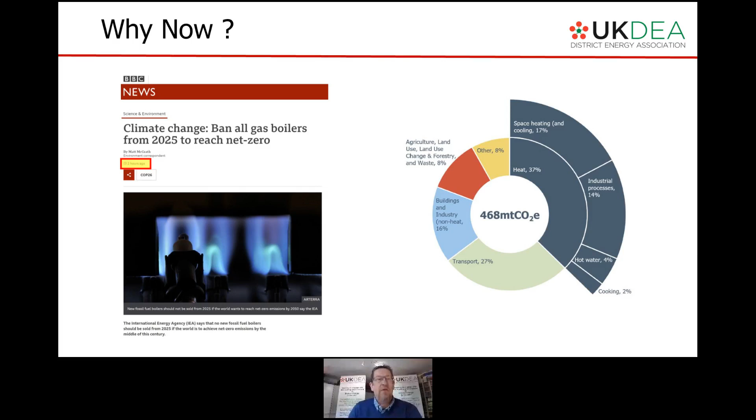So before we go into the conference itself, I'd just like to tell you a little bit about the UKDEA to explain who we are if you haven't come across us before. So we're a non-trade, not-for-profit organisation, and we offer guidance and support to everybody in the sector who wants to join us. We've got scheme developers, owners and partners at the core, as full members, and then around the side we've got the extremely important associate members, the equipment suppliers, installers, consultants, education, services and providers, etc. And our remit, our reason for being, is to offer guidance and support and raise awareness.

And we started from humble beginnings in 2010, over 10 years ago, with 6 founder members. We're now approaching 130 members and we're growing rapidly. I was having a chat with one of the speakers yesterday and explaining that this last month we've seen 5 new members join us, and these aren't people who are going out and aggressively selling the concept of district energy. These are people who are entering the sector and approached us and asked to join. So that's a really exciting development, and it just shows that the time for district energy is now. And all the major district energy schemes in the UK are represented by the UKDEA.

So just finally for me, as an introduction, to explain a bit more about what we do and what you can gain if you're a member of the association. So we're a respected voice for raising your concerns to government. As you can see, this is a joint event with BEIS. We work in very close collaboration with them. We publish every month a 50-page journal. It's pretty much everything going on in the world of district energy in the UK. That keeps you up to date and informed. You don't have to check the news feeds. You don't have to surf the web. We do that for you. We bring the news to your inbox.

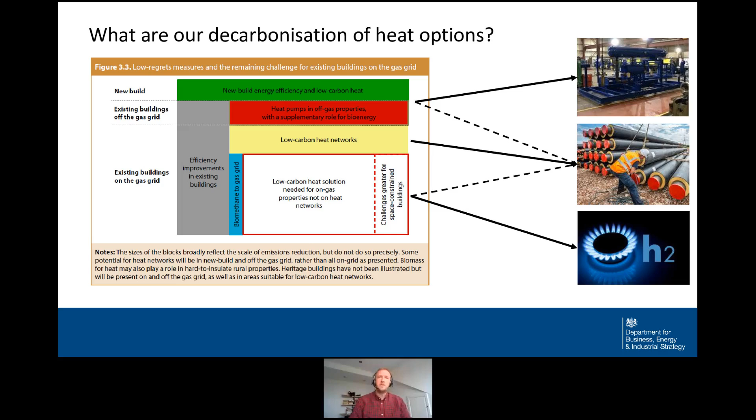We've been talking about decarbonisation of heat for a number of years, and broadly we talk about these various pathways to decarbonisation, and these will be familiar to you by now. Broadly, there's an electrification pathway, heat pumps, electric boilers, etc. There's some kind of low carbon gas, hydrogen pathway, and of course there's heat networks. I think historically heat networks have been seen as a third pathway, but I think that's unfair. I think it's a pathway that facilitates both of the others, with an important addition that we're going to come on to today, which is that heat networks can, of course, unlock the large-scale, low-carbon sources of waste heat that the other pathways can't on their own.

So, where are we today? Well, heat networks, as you'll know, are right the way across the country. There's tens of thousands of them, but actually they're still only providing around 3%, and I'm doing a bit of a friendly rounding up here, around 3% of UK heat demand. And the latest Committee on Climate Change report suggests that actually, we could be delivering up to 20% of heat by 2050 to help us deliver net zero. So, huge amounts of effort and work to date, but still a long way to go.

I mentioned one of the reasons that government really likes heat networks, and that's their ability to unlock these large-scale, low-carbon sources of heat. The kind of stuff that you just wouldn't do on a building level scale, whether that's energy from waste, mine water heat. We've recently seen heat coming from the Tube in London, large-scale water source, industrial process heat. Many of the things that we're going to hear later in today's session. Probably not going to do that on a building scale. You definitely can do that from a heat network perspective.

I mentioned that actually, a heat network can respond to any future pathway. So, if hydrogen is proven, then actually heat networks are well placed to make that as efficient and safe a process as possible. If we end up going the electrification route, there's definitely benefits from that side. And the way that the heat network can interact with this energy system in a really efficient way, reducing overall demand, is a real positive for us.

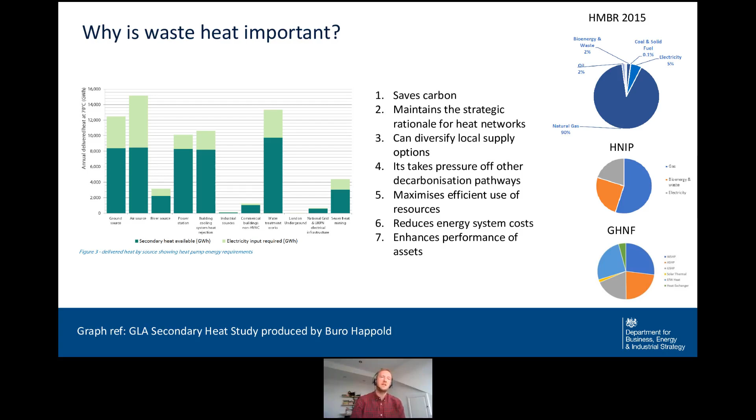Simon talked at the outset about all the news about the move away from gas and how it's starting to gain public and political acceptance, that this is something that's going to be a really important next transformative stage. So I guess I was just going to close on what are we doing about it if we care so much, and I'll just do a kind of whistle stop tour.

I mentioned the Heat Network Investment Project. That's in its final year and has been our 320 million capital scheme. We've got another 2 funding rounds remaining, and that's definitely kick-started the transition from high carbon to low carbon. The Green Heat Networks Fund, due to launch next year, is our new capital scheme, and it really looks to build the foundations for a low carbon market in heat networks through the rest of the decade, supporting connection to energy from waste, large scale heat pumps, etc.

We've got our new heat networks efficiency scheme, essentially looking to optimize some of these networks. That has benefits on its own, but actually some of these optimizations might also enable connection to waste heat, bringing down the temperatures. And we've got a skills program planned, looking to make sure that we've got a marketplace capable of meeting the needs of this growth that we need to see throughout the 2020s.

And then, of course, we've got a regulatory package. So our heat networks market framework, which includes our planned regulation for the sector, and also our heat network zoning policy, where we're looking at ensuring that we're able to designate certain areas as heat network zones, be clear on the buildings that we expect to connect in those zones, and then consider the appropriate levels of mandation to ensure that heat networks we think are economic and technically viable are built out and start meeting the needs of the sector.

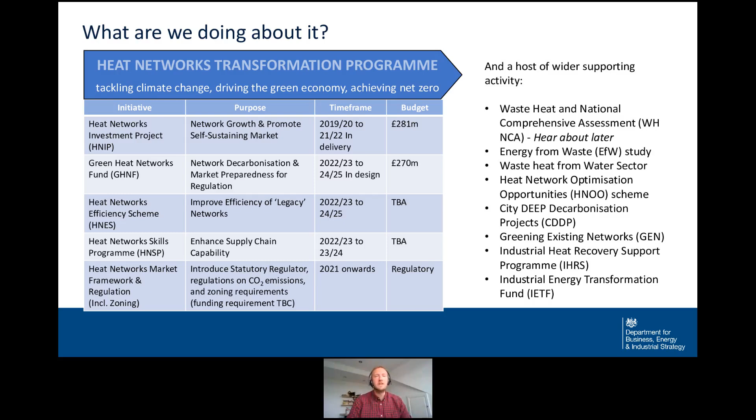And again, we're going to hear more on that, I think, on Simon's presentation around the various ages of heat networks. So that was it from me.

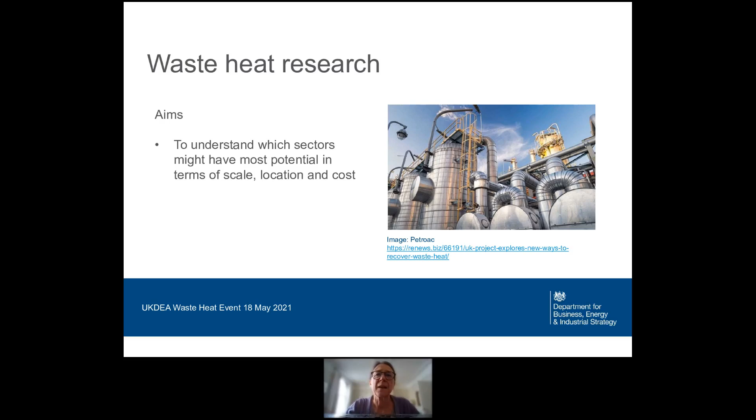So we started by asking Arup and LSBU to help us scope out which sectors to cover. So they looked at existing studies, so what we didn't need to repeat, the scale of opportunity, data availability, data being a critical aspect in this kind of work, the heat potential and so on. And we came up with a list, which we grouped here into 4 categories just to help organize the data. 2 specific ones, which are electricity substations and wastewater, and 2 more catch-all ones, industrial heat recovery with things like cement works, chemicals, paper and pulp and so on, and then what we've called commercial, so cold stores, data centres, supermarkets and so on.

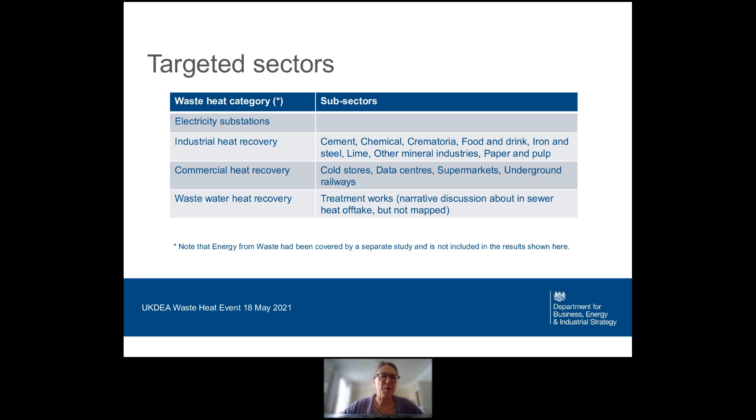So once we decided on the sectors, Arup and LSBU then drilled down into them to get an understanding of the potential in terms of the numbers and locations of sites, the scale in terawatt hours of heat, how that's distributed across the different asset types within that sector and so on, before undertaking the really detailed analysis on each sector.

So this technical analysis involved quite a challenging task of coming up with what I call, in inverted commas, a typical configuration for heat recovery plant for each sector. I'm not going to go into this in detail as I'm not a technical person, and Joel's going to be covering it a bit later, so please save all your questions for him. I'm sure he'll have all the answers.

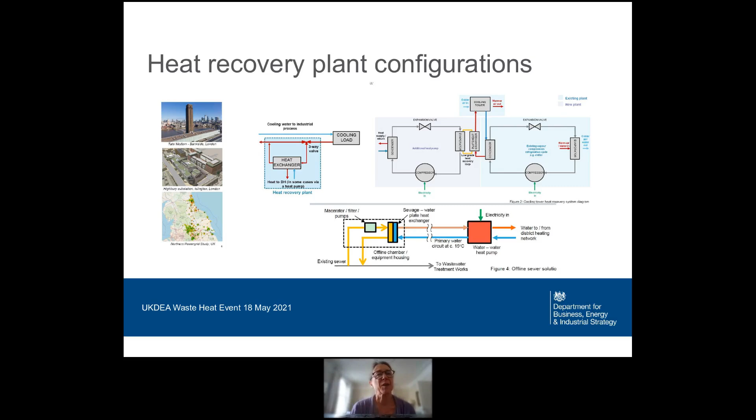But essentially, it was pretty challenging to do this at a generic level when in reality every plant will be different. But they managed to achieve a really good balance of detail and generality, which worked well to serve our purpose. So the important thing was to identify and size all the bits of kit needed to recover the heat from the various different processes so that we could price this up and develop a costing metric that would enable comparison between the different sectors.

So, sorry, this isn't a great slide, rather a lot of information on there, but effectively what we got from the research was a great big database and some maps. So this is an extract from the database. Lots of information here, but the main things to note for now are that these sectors alone identified about 10,000 sites across the country, excluding Scotland. And between them, they're releasing some 60 terawatt hours of heat, just way off into the sky. For context, the estimated heat demand across the whole of the UK is of the order of about 470 terawatt hours. So that puts it in perspective.

The sources in the different sectors generate heat in different ways, and you extract it in different ways, and it's at various different temperatures. I've ranked it here in terms of temperatures. We've got the high temperature industrial processes at the top, like cement and iron and steel, and the low temperature commercial utility processes, such as cold stores, water treatment works, and so on at the bottom.

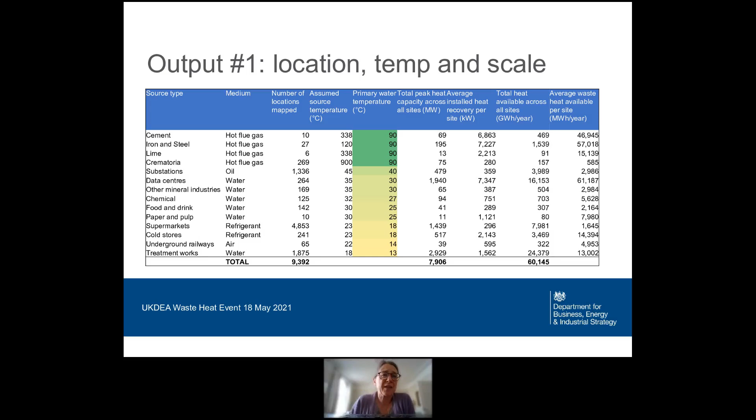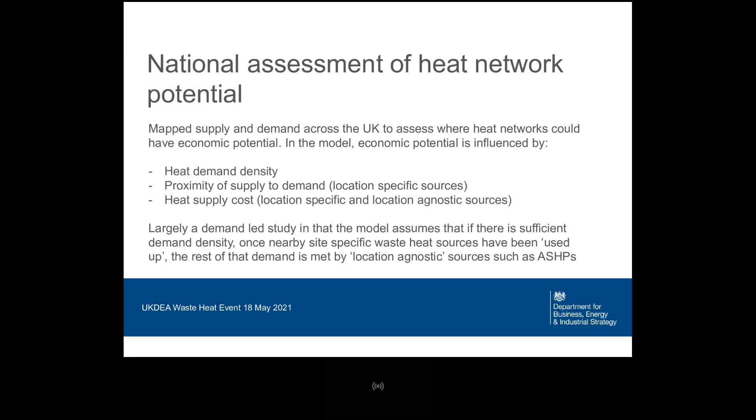So how have we been using this data? Well, as well as helping us to get a feel of the scale of the potential for the different sectors, we've also used it as a key input in a national geospatial model. So we've combined it with building level demand data to try and work out where heat networks could be a viable proposition. So the model uses an algorithm which pulls together demand density, proximity of demand to supply, and the cost of supply. I'm afraid the assessment hasn't yet been published, so I can't share data with you just yet, but I can show you some of the maps that have been generated.

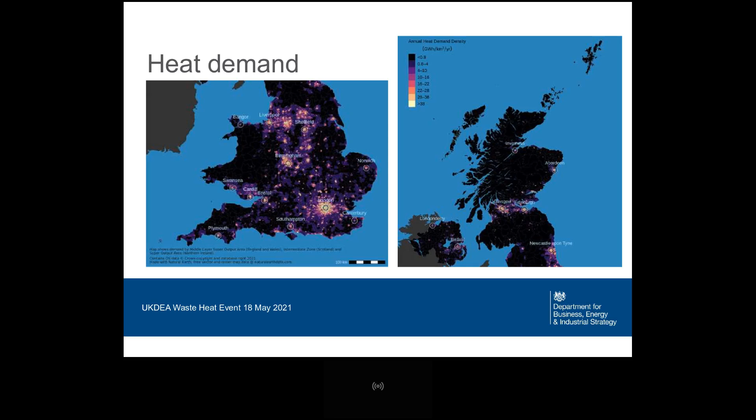So this first one is of heat demand. In many ways, it's not particularly surprising. You see the bright spots where there are big cities. This is based on pretty granular building level data from Ordnance Survey combined with benchmarks of heat demand for different building types. And we had tried to do some kind of calibration with gas demand where that was available.

And the next slide, this is showing the heat sources. So this includes the heat sources I've just been talking about, but it also includes all the other ones like energy from waste, the thermal power stations, CHP and so on. We had to map this at LSOA level rather than as point sources due to data permissions issues. As I said, that's been an underlying challenge with this piece of work, getting access to the data, and it's meant that we cannot yet publish the detailed data underpinning some of this because of permissions issues.

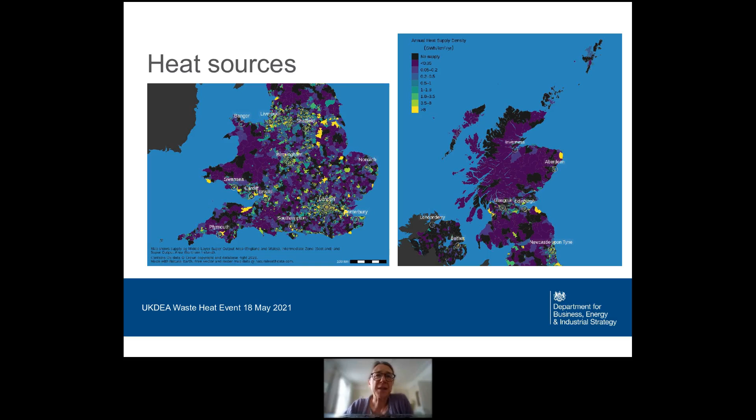So it's worth noting that the total waste heat mapped was of the order of 370 terawatt hours across the whole of the UK, while demand is about 470. I thought it was quite useful or interesting to show the two maps together side by side.

So here, the demand on the left and supply on the right, you can immediately see that the high levels of demand and high levels of supply are distributed slightly differently, which in many ways is no surprise. They're doing different things. But there are overlaps, and clearly this is where our interest lies and where we think that the prize is.

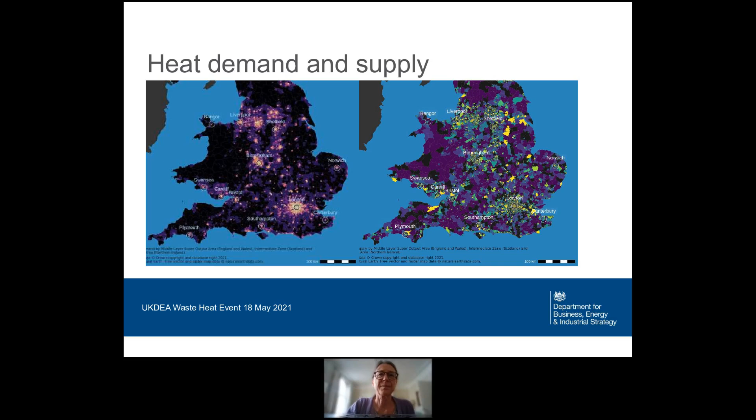And the final map is where the model suggests that heat networks could have most potential. So this, as I say, matches supply and demand, where the supply is the point sources we've been talking about, but it also allows for heat to be supplied by what we call location agnostic sources. So the model will say, okay, there's enough heat demand in this area to warrant building an energy center with a large air source heat pump or ground source or whatever. So the distribution follows pretty much the demand distribution.

So very quickly in summary, I think I'm coming to the end here. Basically, there's a lot of waste heat out there being generated across the UK. It's a resource that we really want to capture and make use of. Different sectors have different characteristics, which we'll hear about later, in terms of the temperature of the heat, the technology required to capture it, where they are. And as a consequence, the cost of recovering heat from the different sectors is different.

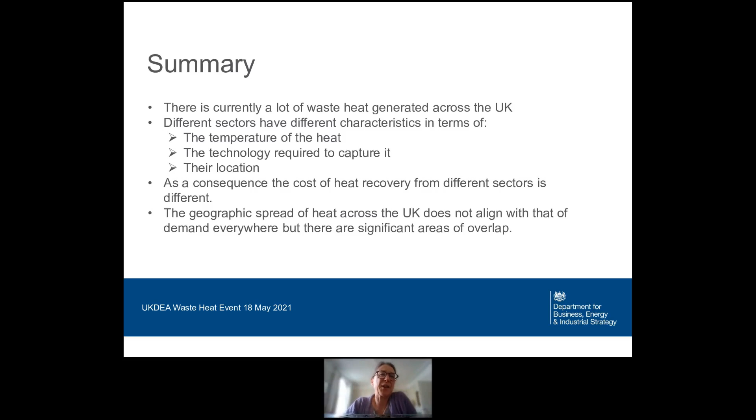As I said, the geographic spread of demand and supply does not totally align, but there are significant areas where they overlap, and those are where we need to target in the work going forward.

So that's it. Thank you very much. Thank you very much indeed, Hen, and really interesting. You've got a number of questions in the question session at the side. Refrain from answering them if you don't mind, because you can come back on the stage at the end of my presentation and answer them. But a lot of it is about the data set, when the data can be available. We've got lots of hungry delegates out there who want to start mining this and hopefully developing schemes themselves. So thank you very much indeed. So I'll invite you to leave the stage.

And we'll pass over to myself now, and I'll do a little presentation really explaining why we think waste heat is so important, a bit of a history lesson really, and I think hopefully you'll find this quite intriguing. So this is about utilising waste heat in what we in the UKDEA are calling the third age of district heating.

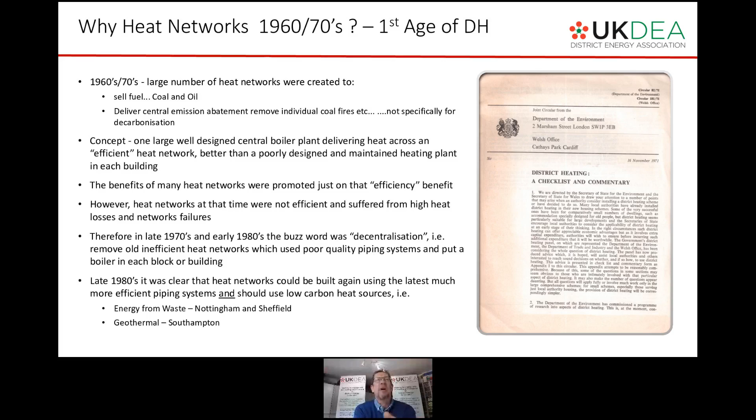However, we turned the corner. We realised, learning from our fellows in Europe, that you could build efficient heat networks, modern piping systems, etc. And in the late 1980s, you started to see a new breed of heat networks coming about. Energy from waste in Nottingham and Sheffield, big citywide schemes, geothermal in Southampton, etc. So that brought to the close what I would call the first age of district heating. So let's move on to what I would call the second age of district heating, a fairly stable period in my view, from roughly speaking 1990 to 2020.

So at the start of the second age, we've got a good understanding you can build heat networks, that heat networks are efficient, and a well-designed primary heat network should have heat losses of less than 10%, should ideally be 5 to 7. We're not talking there about secondary network losses in buildings. That's the subject of a whole other event we'll be organising, but ideally should be very low.

And there was really, as John showed on his pie charts earlier very helpfully, a very widespread use of gas-fired CHP, driven by spark spread, driven by viability, essentially an engine generator recovering waste heat. And there were many large-scale schemes delivered on that basis: Birmingham, Leicester, Olympic Park, etc., many, many others. So that was a long-term period. We're talking about 30 years.

But by the end of that second age, by the time we reach 2020, we're all recognising the grid is decarbonising. As John mentioned, there has been a focus on reducing the carbon content of the grid, and not so much on reducing the carbon content of heat. And although CHP remains viable, its carbon benefit is perceived to have been reduced. And already in the chat, we've got the expected question about the part that CHP has to play moving forward.

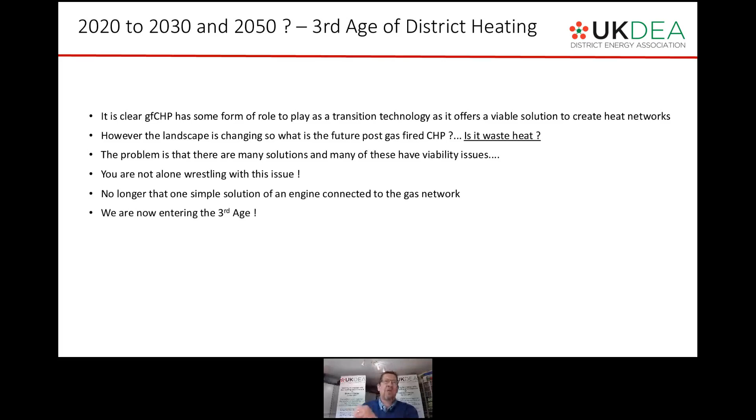But I think what's really important to say is you're not alone with wrestling with this issue. We are all collectively wrestling with it. And if we have a conversation together, we will find the right outcomes. It's where people try to do things in isolation that it doesn't work. So we are jointly on a journey to enter the third age of district heating and make that a success.

So I think the first question's got to be, in my mind, and John touched on this, is why are we even using heat networks? Why don't we all just go to individual building solutions, stop disrupting people, stop digging up streets, stop causing problems? Why do we need to put in heat networks? Well, to me, networks make sense if they deliver a material decarbonisation benefit that cannot be achieved at building level.

And this is exactly what John was talking about in his presentation. So either A, they're using heat sources that you can't access at a single building level: energy from waste, industrial waste heat from data centres. You're not going to build a heat connection to a data centre, very unlikely to do so for one building, again from energy from waste. You'll build a network because that's the only way you can make these viable.

And or where a heat network can bring improvements in viability, efficiencies, or financial economies of scale. So you can get an improved heat pump COP because you're utilising a source which is a higher temperature than, for example, an air source heat pump locally in the building. It also removes the need for widespread grid reinforcement, and it combines heat loads at different times of the day, week, dwellings, commercial, and increases the utilisation of central plant.

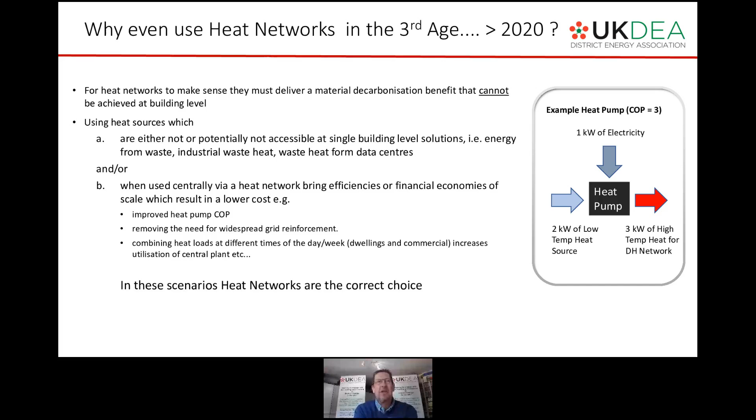Therefore, we believe firmly, and this isn't preaching district energy for the sake of preaching district energy, we genuinely believe, as does the government, that heat networks have a major role to play in decarbonising heat in the UK in the appropriate place. But it's complicated. And this is a bit of a busy slide, so I'll take you through it slowly, because I think it's important for people to understand, discuss, agree, disagree, etc.

They're not everywhere in the country. They are being developed in specific areas, and we'll hear about some examples of that this morning. Indeed, one of the next speakers, Gareth from Cardiff, will be talking about the heat network that Cardiff City Council are creating from the energy from waste plant in Cardiff, but the locations are limited.

So I'm just going to start with the definition of waste heat. If this is teaching you to suck eggs, sorry, but I always find it useful to check that we're on the same page. So the definition I like to use is that it's thermal energy that's currently being rejected to the ambient environment. That could be rejected to the air, just hot air, somewhere nearby, or rejected to rivers or sea, or possibly into the ground.

And it's also worth noting that although most of this presentation and conference is really talking about heat in terms of the hot stuff, it could also be cool. So if you've got a rejected supply of something very cold and there's someone that needs that cooling for something, then you could also use a heat network to grab that coolth.

I guess the main thing here is that we want to make sure that we're advocating the use of heat in an optimized way, and therefore minimizing it before we capture it. So what we don't want to be doing is encouraging waste heat just because we can then capture it and utilize it elsewhere. A really basic example of that is a supermarket: they might have quite a lot of waste heat, but you might realize that they don't have very well controlled refrigerators. So you probably want their refrigerators to be controlled first, maybe consider doors or some other things to reduce the load on them before trying to capture that waste heat. Otherwise, it doesn't really feel part of the whole picture of driving towards a sustainable future and net zero.

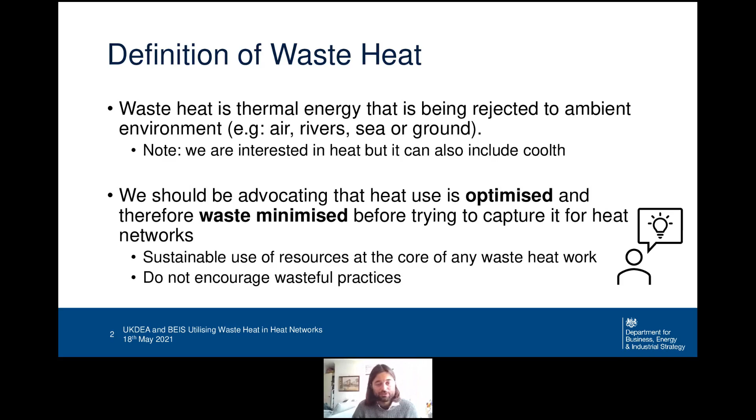So as was briefly touched on, particularly in the last couple of slides of Simon's presentation, the different types of waste heat I would break down into two categories: direct use and indirect use. Direct use is when the temperature is high enough that you can use it directly. We could say here that's in excess of 60 degrees, but it depends on the user's need. And indirect use would be something below 60 degrees, and typically you'd use a heat pump to upgrade that temperature. It's also worth noting that operating temperatures of heat networks is a contentious topic. There are lots of schools of thought on what temperatures they should operate at. And is it all about temperature as to whether it's direct or indirect use?

The following example will hopefully prove that it's not, it is, but it's also not. So if we assume that you've got a 50 degrees C heat source, could be from anything, you could have direct use of it if, for example, you wanted 40 degrees C for a biological process. Then you could have a heat network, take that 50 degrees C heat, run it around whatever thing you want to warm up to 40 degrees. You don't need to do anything with it.

Or if you're going to send it to a school and some other buildings that are probably quite old and need something above 70 degrees, then you'd need to use a heat pump. So I hope that gives an appreciation for what we mean by direct and indirect use, and it is really based on the actual end user's needs.

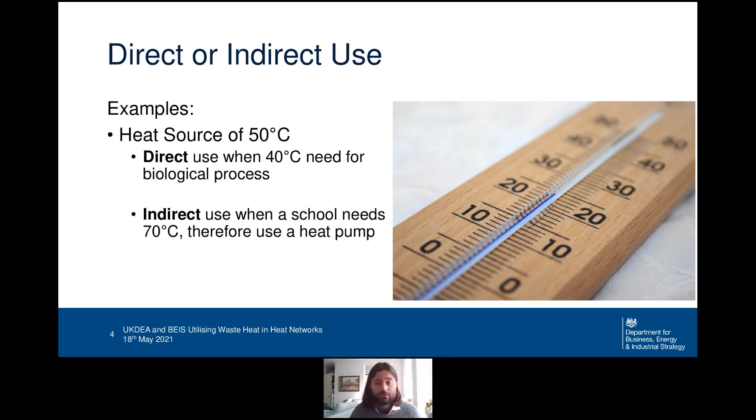And I think that's really key for a lot of heat network challenges, is that it's trying to match up how you deal with what the end user needs and what you've got as supply options. So I'll give you another example.

But just as a principle, you might have steam coming in at something like 430 degrees C, and at the different pressures of the turbines, you could take that steam out at either 180 degrees, 150 or 80, and use it directly for whatever that process may be. It's worth being aware that the steam that you take out of an electricity generating turbine, you then cannot generate electricity with it, because that's the thing that's driving the turbine.

And you could arguably connect them to a heat pump and have an indirect source of heat as well as a direct source. And this is just to give you a little feel for how there might be a bunch of different applications that need different temperatures, and you could utilize some of this heat throughout this process for them, and where direct heat and indirect fits in.

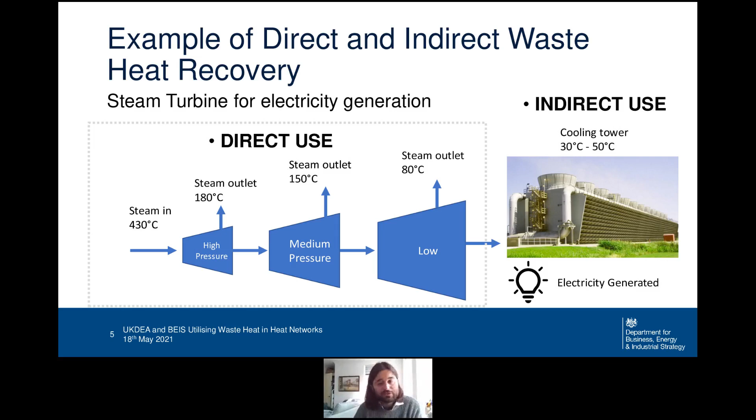That might have some oil in it running at 40-ish degrees C. You might then have a heat exchanger there that then takes it out. It puts it through a heat pump. That heat pump raises it to whatever you need it to be, 60, 70, 80, 90 degrees C.

The other form of indirect use could be that you've got something kicking out waste heat here, and you don't actually physically connect anything to it. You just put an air source heat pump nearby to swallow the warm air that's there. So if you know that the air around something that's kicking out heat is always going to be at 20 degrees or 30 degrees, then why not shove a heat pump next to it?

It would be better to take the heat directly from it and utilize it more at a higher temperature. But if for whatever reason, due to resilience issues with whoever owns that heat source, they don't want that, you could, in theory, just shove an air source heat pump somewhere a bit warmer than it would be if it was right next to your building, where maybe at the time when you really want the heat, it's probably below 5 degrees.

So there's a couple of examples of indirect use of heat, because you'd have to raise the temperature with a heat pump. So just a little bit about how you might capture waste heat. So this is looking at capturing waste heat from gases.

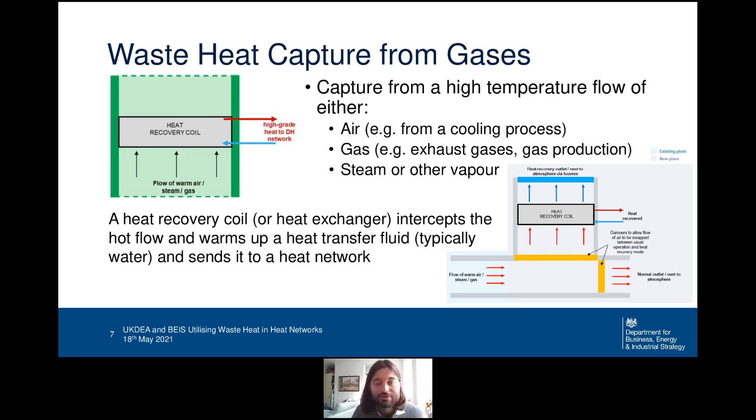The other option is on the right-hand side, where you might want to have some kind of bypass arrangement. Or maybe you can't fit the heat recovery coil into that thinner tube on the bottom. So you put some kind of dampers in the way, you put a much bigger thing on top of it, and you try and direct the air around it into your heat recovery coil. But you might also want to have the ability to not necessarily send heat through your heat recovery coil when it's not needed. And if I'm not mistaken, I think this was stolen from a diagram of how some of the heat recovery on the Underground looks. So that's heat recovery from gases.

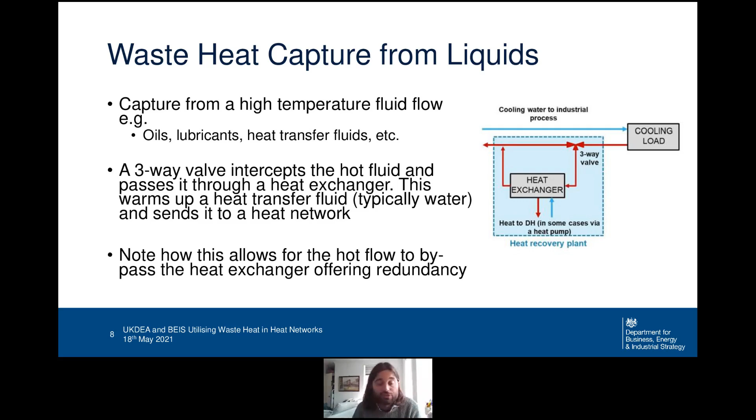Or if it's not hot enough, you can then put it into a heat pump and raise the temperature. You could also, as the previous slide showed, avoid this three-way valve arrangement and just always send it through the heat exchanger. And that just depends on the needs of the application at the time. As was already mentioned, there's issues around resilience here as well. So if you're tapping into someone's existing cooling load, they might want to make sure that they can still use their existing equipment to cool things down if your heat recovery equipment fails for whatever reason.

So we're just going to go through some of the sources of waste heat. I think one of the easiest ones to think of is cooling as a source of waste heat. The mantra here is, wherever there's cooling, there's waste heat, because you're taking heat out of something in order to cool it down. Sounds kind of obvious, but it took me a little while to get my head around how to think about cooling in the context of heating.

So I hope next time you go to the shops and you look at the fridge there, whether it's because you want to pick up something healthy or you're treating yourself to something, you then think about actually every time you're opening it, you're actually generating waste heat.

Other sources to think about are sewage and wastewater treatment. It's not the most friendly topic to talk about, but effluent does generate heat. The biological process there produces heat. Exhaust gases from any kind of combustion process, underground railways such as the London Underground, any drying processes, and electricity distribution as well, because all losses in electricity systems are pretty much heat.

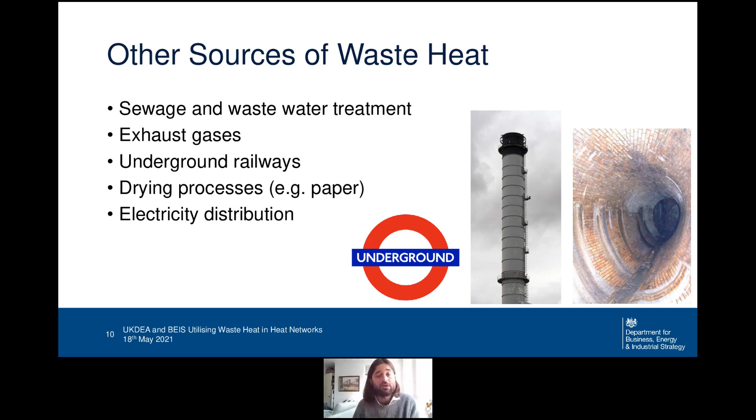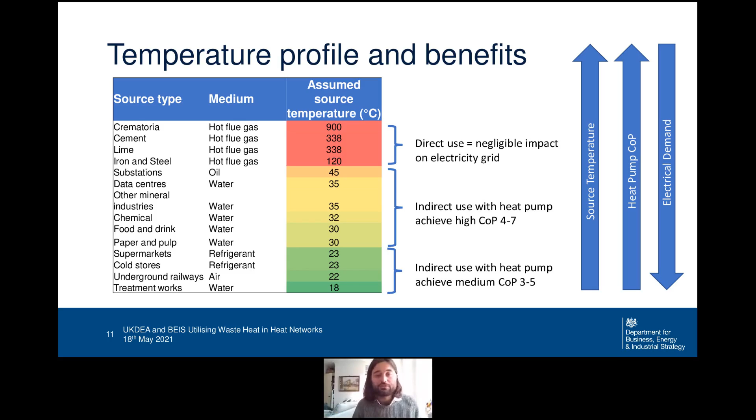So just to wrap this up, there's quite a few different things we've covered here. So waste heat can be used directly or indirectly. There's different ways to capture it, if it's a gas or a liquid. There's lots of waste heat sources out there, and high temperatures are good. And they're good because they reduce electrical requirements of heat pumps, which then reduces emissions, and it reduces demands and impacts on the grid. So I think that's the end of my presentation.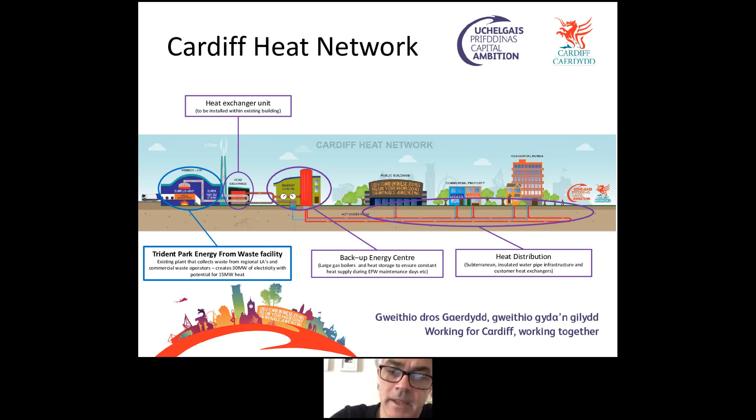So just a little bit about the project history. The energy from waste plant arose from a procurement which was a regional one done by a collection of local authorities. And the question was, now that we can't go to landfill, what do we do with our waste? So we weren't asking for an energy from waste plant, but that's what the optimum solution from that procurement was. At the very start, the company themselves were looking into a heat network, but that didn't progress very far, I think largely because of the need for grant funding.

But by then, we had, and I think it was actually pre-HNDU, but I might be wrong, but it was very early anyway, we'd had some funding to look at how we reacted as a customer to that proposal. But then when the commercial route became a bit difficult, we converted that fund to investigate the potential for putting the council in the lead to engage.

So since then, we've had quite a journey of developing feasibility and a wider city master plan, which looked at other potential sources of heat across the city. It settled on this one as being the optimum one for now. And an outline business case was approved by the council a couple of years ago. That gave us authority to go on and make the final business case, which is all done now.

That supported our capital funding applications and triggered the various procurements that we've gone through. And throughout that, using the HNDU funds, we've been supported with expertise from the Carbon Trust, who've helped us along the way.

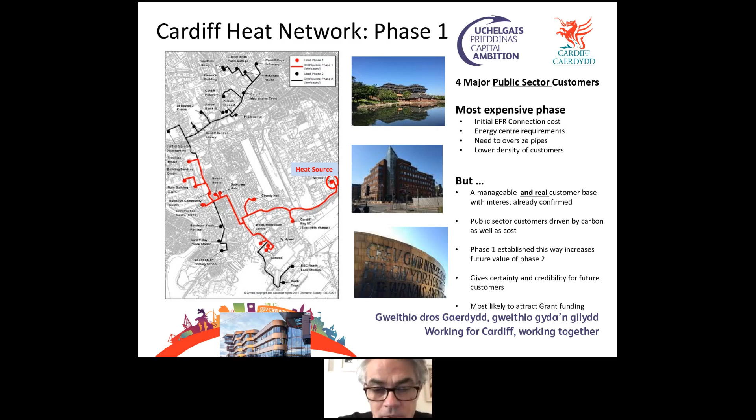So our business case, as I said, is based on just those 4 real customers. They've signed memorandum of understanding with us, and we went that way. It made the business case very, very difficult, obviously, because there's a lot of upfront investment and few customers to supply. But we also thought that it gave certainty and credibility for future customers that the likes of those were involved. So that's the network.

So just finally, we've successfully secured our funding for the project. So that red line that I showed in the plan earlier on costs about 15.2 million, and it's made up of a grant from HNIP of 6.6, and we've been very fortunate as well to get a loan from Welsh Government, which has been provided interest-free over 35 years. So that's all in place. We've established the Cardiff Heat Network Limited, which is a wholly owned council company, but it's a special purpose vehicle to operate the network. And that was, as well as being a sensible thing to do, a requirement of the grant funding.

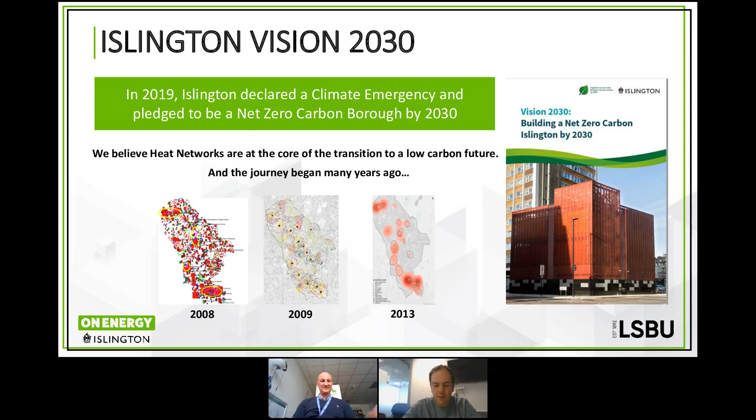Our journey began many years ago. The first heat mapping that we commissioned was probably around 2008, 2009, and we kept fine-tuning some of the clusters that were suitable for heat networks. Back in 2013-14, we commissioned the decentralized energy master plan. Sorry, the master plan came a little bit later. But by 2012, we commissioned the first heat network, the first energy center.

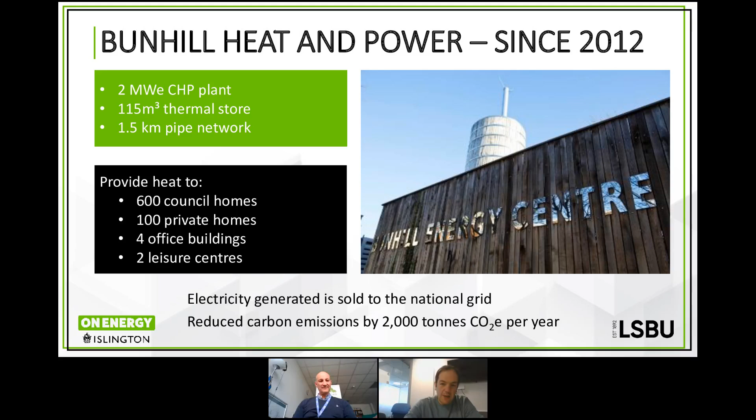Bunhill 1, Bunhill Heat and Power is the name of the network, and at this time it was one single CHP engine, 2 megawatts, so relatively big scale, but it wasn't that big. We were providing heat for about 600 council homes, 100 private homes, a couple of leisure centres, and it was a real success, very successful from many points of view: social, political, and obviously environmental at the time. Bear in mind that in 2012, CHPs were still considered a low carbon heat source, and that encouraged the council to move forward and to create Bunhill.

We started developing Bunhill 2 conceptually around 2014, and in 2016 we started the construction. At the time it was the first of its kind, the first time we were capturing low grade waste heat from London Underground. The plan was to build this energy center with a 1 megawatt heat pump plus 2 small CHP engines, and this center is connected to the heat and power network. So effectively, we have a larger network today with 2 independent energy centers interconnected, and with a much more flexible generation matrix.

It was a great opportunity for us to work alongside TfL, specifically the London Underground branch. If anyone has been on the tube recently, especially in the summer, you probably experienced the severe overheating problem there is in the tube, especially around the central London stations. Overheating is a major problem for London Underground, and they have a number of vent shafts around the city, so it was a great opportunity to capture some of that waste heat and at the same time provide them with some cooling.

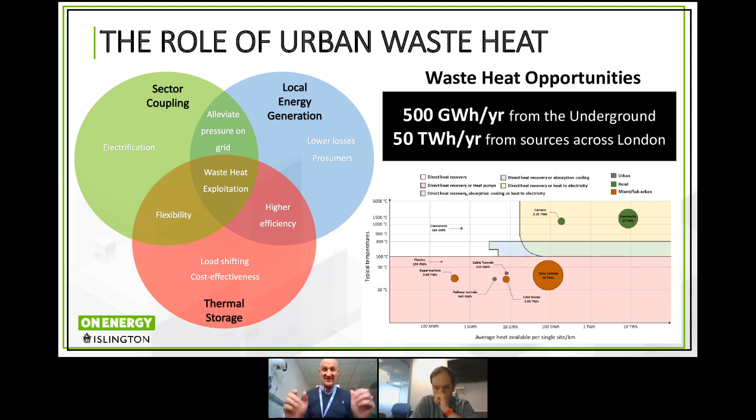and carbon emissions. On the right hand side, you can see the opportunities from heat from the underground in terms of gigawatt hours, and in total the amount of heat that's available from secondary heat sources is massive in London. And below that's a graph that shows opportunities for a range of different heat sources. The graph shows temperature and the amount of heat that's available. The big circle there shows data centres. This is a piece of work that my colleagues Akash and Enrique have produced, and data centres are a real opportunity.

This brings me to the next slide, and I want to talk about GreenSCIES. GreenSCIES is a way that we're exploiting the opportunity for heat from the underground and from data centres. You can see on this infographic, developed by Cullinan Studio, the concept. It's a 5th generation heat network, which is at ambient temperature. So the pipes in the middle there are a heat network at ambient temperature. That means we can capture heat from different heat sources, in this case heat from the tube and heat from data centres.

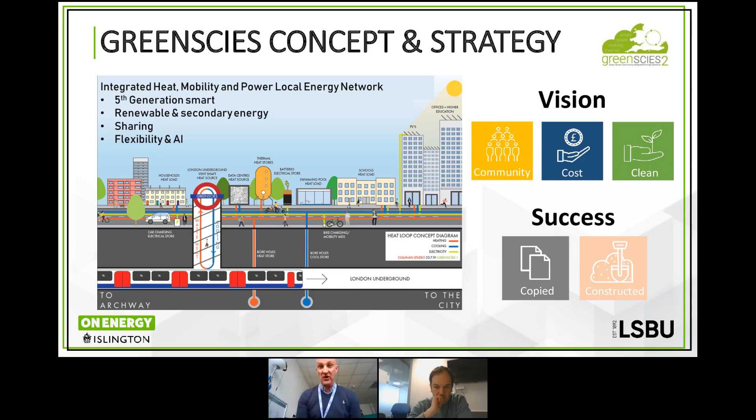But not only that, we can use renewable energy when the sun shines and there's an abundance, or local generation of electricity behind the meter with PV, which means that we can use electricity in a very low carbon way. And the brains behind that is machine learning, flexible, smart control that allows us to share energy and use it at the best times. And in doing so, GreenSCIES is able to deliver against our vision. Our vision is about using clean, cost-effective energy, and developing schemes alongside the community. And success for GreenSCIES is when we result in construction and it being copied.

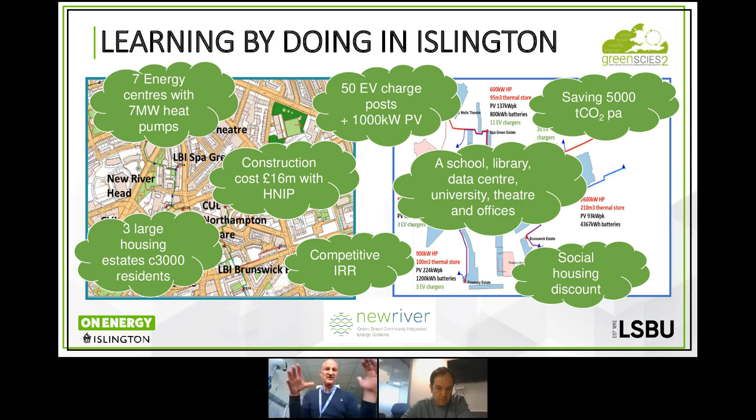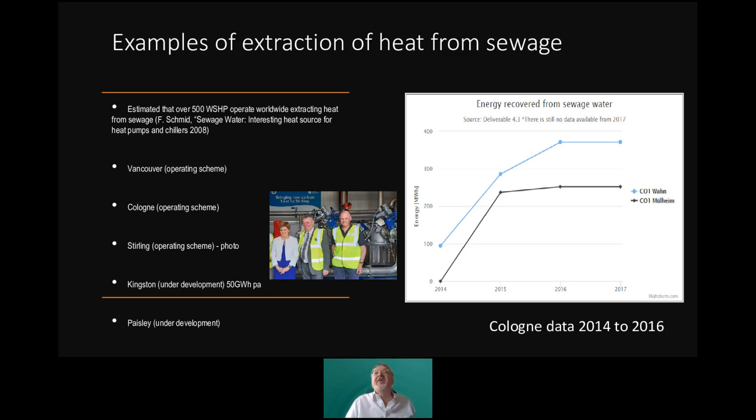I'm just trying to work out how I can move on to the next slide. Here we go.

Obviously, I live in the London area. Thames Water is an enormous water company, the largest in the UK, and has got 15 million customers. That's an enormous number of people. It's an enormous area that it covers, most of the densely populated areas of the UK. It has been estimated, by someone from Fairheat last year, that the waste heat coming out of the Thames Water plant would be about 10 terawatt hours annually.

So there's an enormous amount of heat there that could be exploited, and water companies are interested in this dialogue. They want to improve their environmental image, and they're also looking for new sources of income. So certainly it's been an open door with Thames Water as far as we're concerned with the Kingston project. The water industry as a whole is looking at this issue, and I know the BEIS are involved in that. So hopefully good things will come out of that.

Moving on to Kingston. In the Kingston area, there's a Thames Water plant, the Kingston wastewater treatment plant, and that produces about 70 million litres of wastewater a day, which it injects into a local river called the Hogsmill, and the Hogsmill then feeds into the Thames. That injected water is about 10 to 15 degrees higher than the environment. So with that volume of water and those temperatures, there's obviously something that we can exploit.

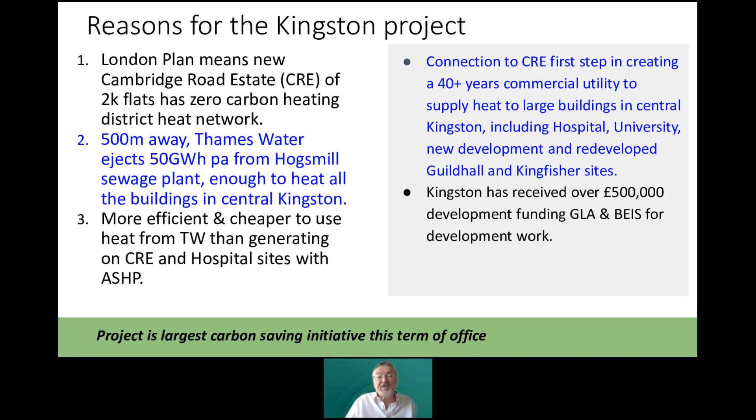The good thing that we had in Kingston is a first customer, which is the Cambridge Road estate. That's going to be a rebuilt council estate about 500 metres away from the source of the heat in the Hogsmill River. So very short distances involved, and then the idea was to take the heat on to Kingston Hospital in the first phase. Kingston's been very generously supported by the government and the GLA on this project so far, so thanks go to them.

But there are also some new developments in Kingston coming along, which the council has under its control because they're council-owned land. And there needs to be a feasibility study to make those connections to those sites. We also have another potentially very large customer with Kingston University as well. So that's a project really in a nutshell.

Just in terms of the people involved in the project so far. So we had Buro Happold have done really all of the technical and the commercial work on the project. We had Avico as the project manager, who also did a recent application to HNIP. And myself, I was working on the liaison really between the consultancy team and Kingston Council. So if you want any more information, please contact me about it. Thank you very much.

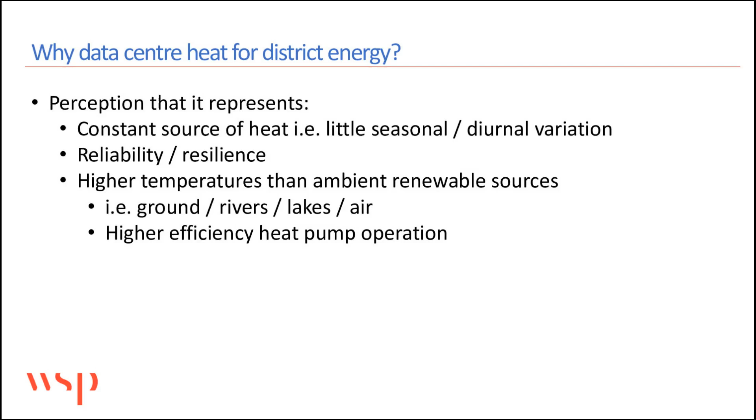So, why would we be interested in data centres? Well, there's a perception that data centres offer a constant source of heat with little seasonal or diurnal variation. That's absolutely the case. You'll be familiar with the importance of data centres in modern life, in that we're entirely dependent on them for so much, including today's event. So they operate at very high levels of reliability. So therefore, this is going to be a constant and resilient source of heat potentially.

And the other major benefit for data centre heat is that it's actually at a higher temperature, so typically 30 degrees C or more, than alternative ambient renewable sources such as the ground, river water, lakes, or indeed ambient air. And that, as Joel pointed out in his presentation, will lead to higher heat pump efficiencies.

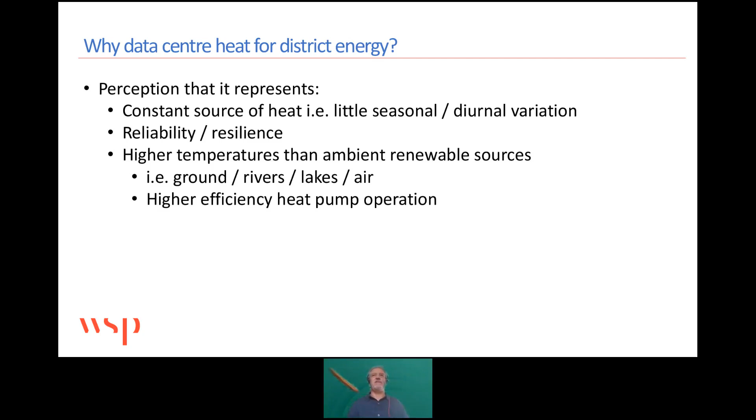We can broadly split those into two types of system: those based on liquid cooling systems, where you've got chilled water, for example, as your thermal transfer fluid, or glycol, or some other form of refrigerant, or indeed air-based systems.

The other thing to note is that, as you might expect, technology is moving apace with respect to data centre efficiency, and there's a lot of work being done. In fact, I believe there are systems currently operational where they're actually using liquid to directly cool the server racks within the data centres. That's potentially very significant, in that the temperatures available from such systems would probably be in excess of 60 degrees C. So in Joel's terms, that would allow us to use that heat directly in a district energy network.

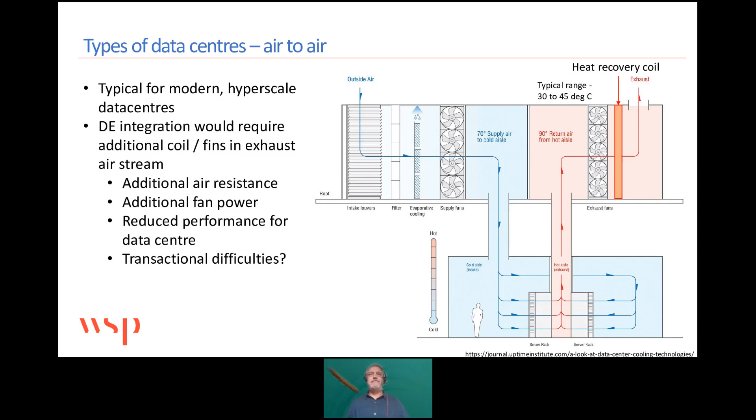So looking at liquid as your heat transfer medium. So you've got, again, a graphic at the bottom here showing how cooled air would be circulated through the servers and then returned and then cooled again. And you've got a cooling tower circuit supplying water at 20 and coming back at 30 maybe. The opportunity to recover heat from that circuit probably requires rather less intervention.

So you've got a heat exchanger here. So that would be cooling the water going into the cooling towers maybe by a couple of degrees and giving us 28-degree water that can go into our water source heat pump that supplies our district energy system. Now, the advantage here is that there is some benefit to the data center operator. We've reduced the temperature already before it gets to the cooling tower, so the fan power requirement will fall there. So there's a cost and an environmental benefit, and that gives us some opportunity to engage with the operator.

I have to say that some of these remarks are based on some of the difficulties we've had in getting good responses from data center operators. I think you'll all recognize that the operation of these systems is highly profitable, firstly, but also any consideration that might impact on their reliability. I mean, the costs of, for example, some form of outage are almost incalculable for some of these operators, and therefore they really can't consider that. The opportunity here with this heat exchanger coming off this circuit is that the potential for any interruption in the operation is minimal.

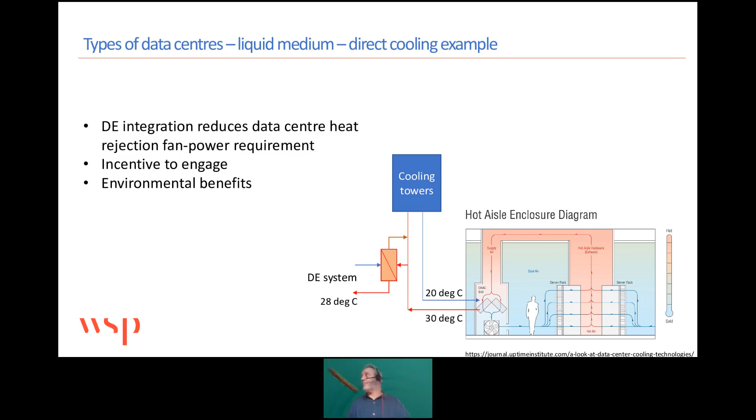So how could we utilize this data center heat? Well, either in a centralized conventional DH network with a water source heat pump, or potentially in an ambient loop. I think the considerations as to which of those is appropriate are really locally driven. So they're all about the buildings that you're going to be connecting. Do they need the higher temperature that we'd get from the centralized plant system? Also considerations around whether or not you're looking to do a baseload supply or peak supply.

Considerations around the space availability for pumping stations and so on. And also there's some commercial considerations here about the utilization of thermal storage locally within buildings, allowing you to access lower cost nighttime electricity and improve the commercial benefits of the project.

And just turning to that question of the commercial benefit, Simon in his opening remarks was referring to the fact that the appropriate counterfactual to consider district energy against is an individual air source heat pump, rather than the current counterfactual of gas boilers.

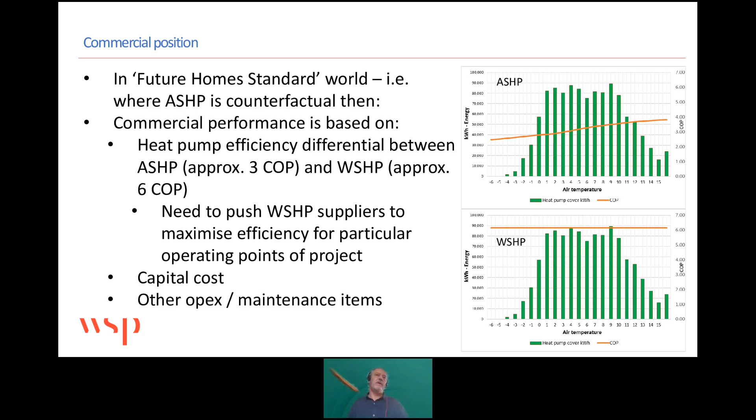One of the things that I think we would be looking to water source heat pump manufacturers to do is to consider what improvements in efficiency they could get if they were just looking at a relatively narrow operating band, i.e. the sort of situation we have here, where we've got a fairly constant temperature source, and see what that would do in terms of reducing capex, improving COP, and also the operating costs of the units themselves.

So the key messages with respect to heat recovery from data centers: there is a wide variety of data center types and designs, and there are different incentives for different data center operators, which are dependent somewhat on those designs. Local circumstances will dictate how best to integrate the data center heat recovery into your district energy network, ambient loop

versus traditional DH, obviously. And there is this potential of liquid cooled racks offering potentially much higher temperature waste heat, 60 degrees plus, which obviously could have a significant impact on the viability of taking offtake from these data centers and supplying your district energy schemes. So perhaps that's something we should be encouraging our data center operators to engage with.

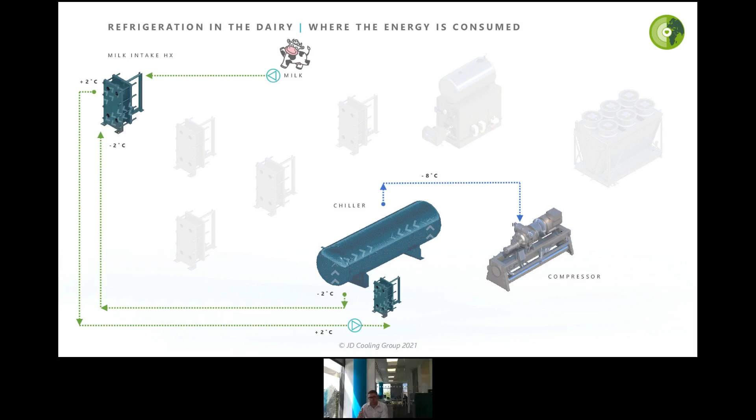So the heat transfer is taking place within the refrigerant medium. That will boil the ammonia gas, which is then recompressed by a screw compressor in this application, or a piston machine, because there are two different types, of which we then lift the pressure of the gas recovered to say 15 or 20 to 32 degrees design condition, which is then fundamentally rejected via either an air-cooled condenser, evaporative condenser, hybrid condenser, or even absorbed into a heat exchanger to a water-based system.

So all the energy that comes from the milk, essentially from the cow through the heat exchanger, ends up in the ammonia refrigerant, and then is rejected to the atmosphere, which is typically done in most industrial applications around the UK, worldwide, in various different ways.

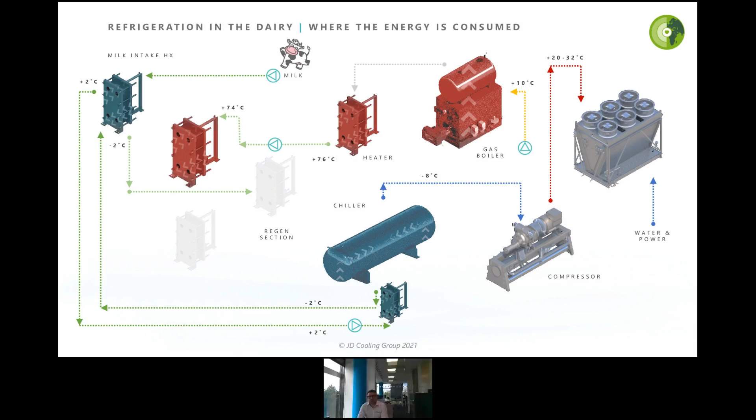We then use a gas boiler to generate heat, clearly. That heat then is used to pasteurize the milk at around about 74 degrees. And it then goes through into a regen section, a heat recovery section on the pasteurizer itself, which uses the intake milk to preheat the milk. Then it comes out of the regen section and ends up in the chilled heat exchanger, and fundamentally will end up residing in the milk bottle which we drink.

So we're using different forms of energy. We're using electrical power in the refrigeration compressor to compress the gas that absorbs the heat from the product, which in this case is the milk. We then lift it to a temperature, in our case on this design, of 32, and it will range between a minimum condition of 20 degrees to 32 degrees, depending on the ambient, wet bulb, dry bulb throughout the year. So cooler in the evening and warmer in the day when the sun is up. We also then use the gas to generate heat to do pasteurization.

So we looked at an application here, moving to the next slide, where we install an industrial heat pump to recover that rejected energy, lift it from the 20 degrees saturated pressure or 32 saturated pressure to a useful pressure of +83. That will then give us 82 degree water off the other side of the heat exchanger that we can use for pasteurization. So therefore, we don't need the boiler to generate the heat source to do the pasteurization on the milk application.

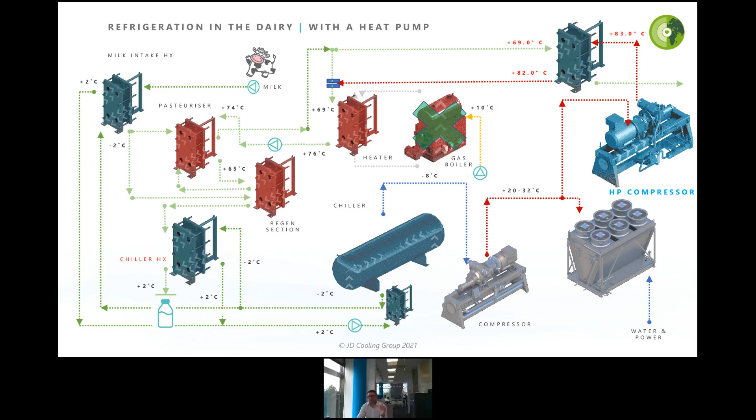So we're recovering basically all the heat from the system as much as we possibly can, and using it as a handshake principle, where we cool on the milk intake, we heat at pasteurization, and then we post-cool on the chill heat exchanger.

So this application, what does it do? Well, it saved us 2.2 million kilograms of CO2 a year, based on about 7,000 hours operation, and the COP performance was around 3.2, lifting from 20 degrees gas temperature on the ammonia side to 83 degrees, which we do in a dual stage heat pump application.

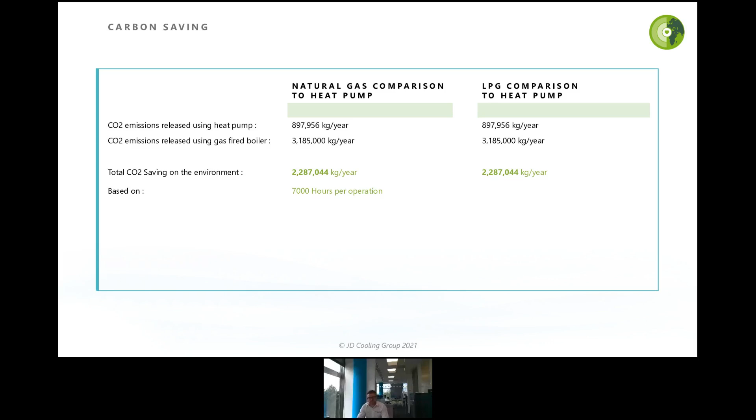So it was very successful in terms of the application, and the considerable financial savings that the dairy will benefit from, depending on the unit cost and various other aspects, could be up to nearly £200,000 to £300,000 a year in natural gas saving, which obviously is very significant for net carbon neutral moving forward, really.

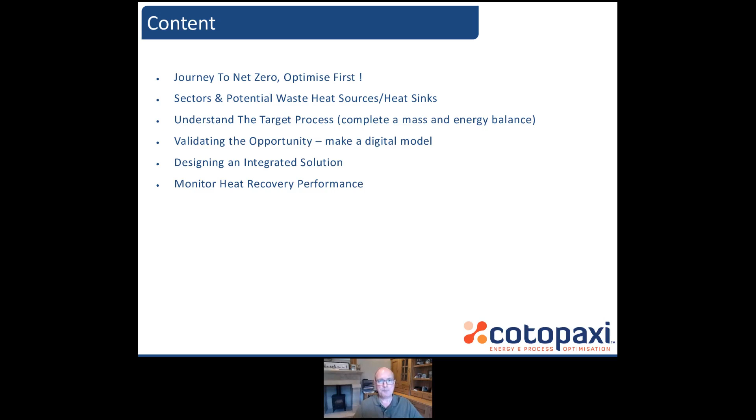So rather than just biting off one or two little heat recovery opportunities and having several heat pumps, if we can have multiple sources of heat integrated into a bigger energy solution, we can then bring all that together and just use one heat pump. And then once you've done all that, you need to monitor the heat recovery performance. So that's the typical journey to net zero.

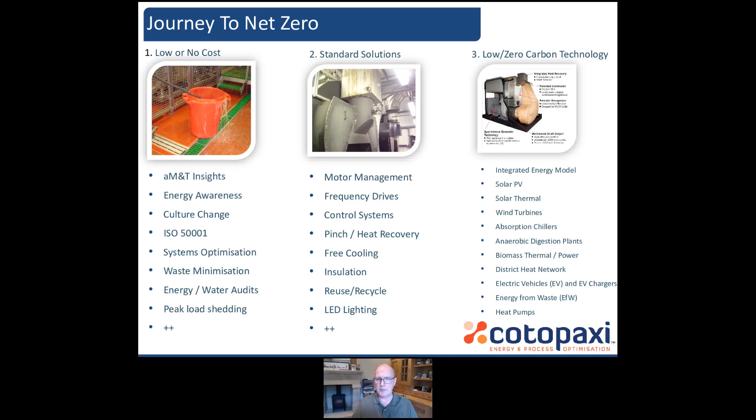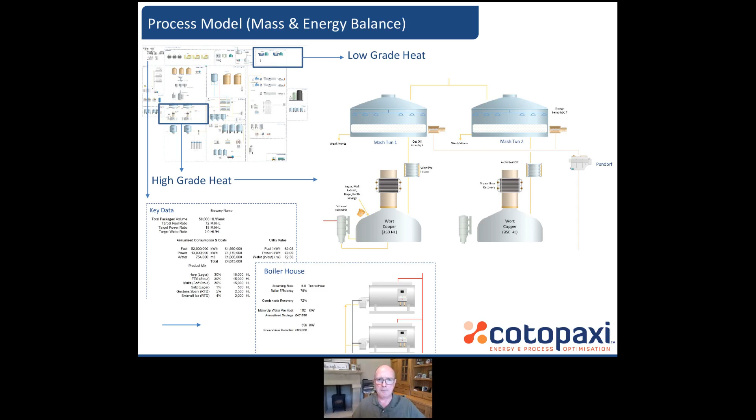So this is really, again, step one, looking at the direct heat recovery. It's used extensively in a brewery, in the vapor heat recovery section where we're boiling the beer, called the wort. This heat is then recovered into a hot liquor system. If that part of the process is not optimized, then it will overflow, and it's absolutely pointless recovering the heat if you're just going to allow it to go down the drain. So step one, really optimize your systems.

Then diving in to another level of the heat and mass balance. Again, these are all models that have been produced in Excel. This is an almost identical process to what Mark's just presented. I'm pasteurizing pineapple juice here, the same process as for doing milk.

What we would do at this step is eke out all of the flows. So you can see the product coming in at 30, it hits the preheat zone, which during this deep dive audit, we found was completely incorrect. And I'll come back to that in a second.

So by analysing this level of detail, we very quickly found out that this pasteurizer was poorly designed. And there was indeed a heat recovery opportunity right there in our face, rather than ditching that heat to a cooling tower, which was actually happening. And this is a live project that I've just recently seen in the last couple of months at a pineapple processing facility.

From our mass and energy balance here, we can start to identify where we need to install some metering points, so that we can monitor this on a long term and also see the high increment data, measuring the flow rates, the temperatures, and ultimately using our sensible heat calculation to make a profile of the relative heat flows. Only from this, then we can start to design a system.

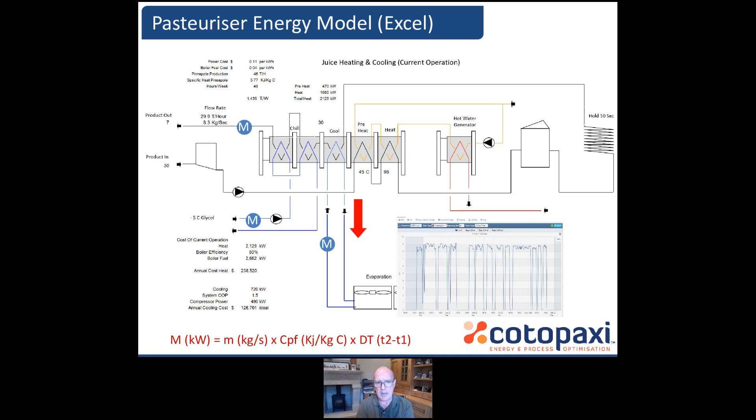So we then take a shameless plug of our application Strata here, where we build an exact copy of this pasteurizer, the juice pasteurizer, in our software Strata, which is an IoT cloud application for modeling all sorts of heat systems. And you can see here where we redesigned and put an extra plate pack here, and the hot product going out, in this case pineapple juice, is actually heating the incoming pineapple juice before it gets to the heat zone. So that was a fundamental mistake. We made that change and reduced the cooling load at the cooling tower.

The purpose of doing this is so we then gather the data and we can start to design our system. And again, another Excel model, happy to share this, but this is a classic example of where you'll have multiple heat sources. So I can see I've got my juice cooler there. I've got 939 kilowatts. I've got some cooling from the powerhouse, where we're using cooling tower water to keep the air compressors cool. And then we've got some 2,455 kilowatts from process cooling.

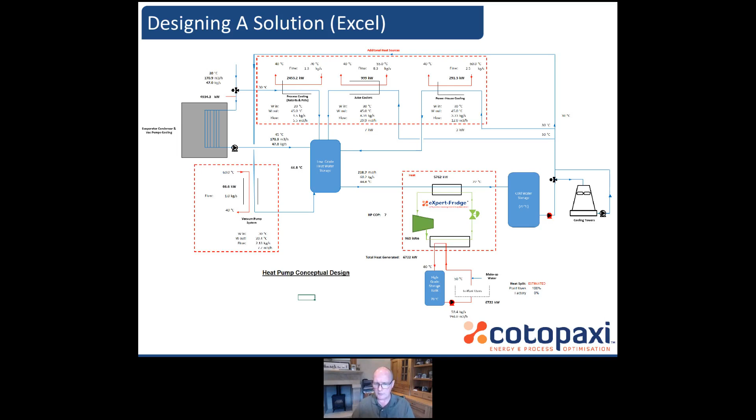So taking that another step further, we would model that heat pump in the box up here called heat pump, and then incorporate that with all the other heat recovery technologies, like the biogas CHP engine, the absorption chiller, and how that feeds the relative flows in the heat network.

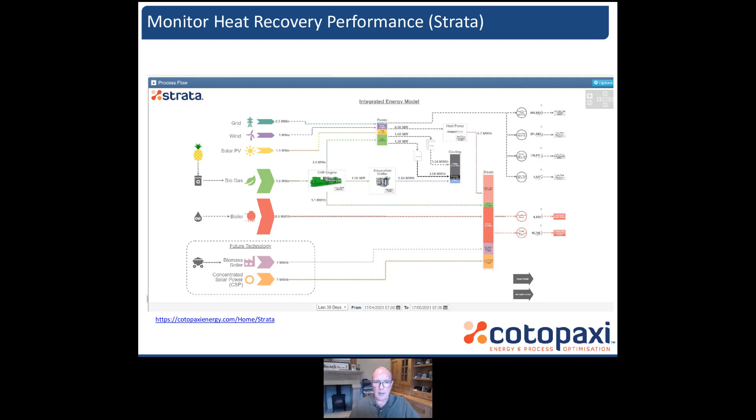And then finally, I know CHP has been a topic today. What we see a lot is people are installing CHPs, recovering heat, and it's not being used effectively. Unless we've got an effective monitoring system, then we run the risk of not using our recovered waste heat.

Lovely. Thanks very much indeed, Cliff. I think a really interesting window into the various sources of heat in industrial processes which are going unrecovered.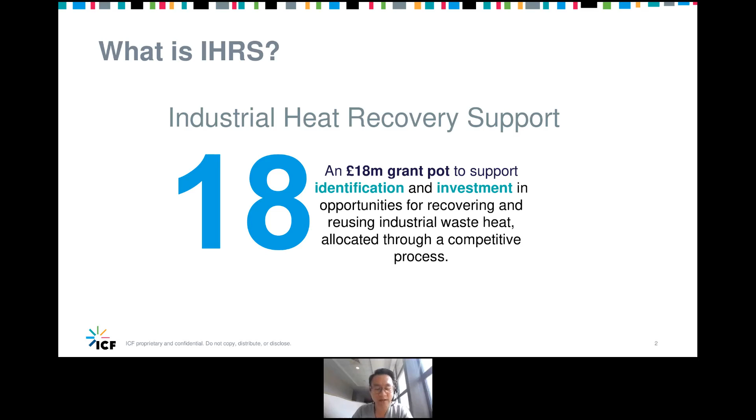So my name is Yeen. I'm from ICF. We are the program delivery partner for BEIS on the industrial heat recovery program. And as Simon mentioned, I'll share a couple of lessons that we've learned from the program, and hopefully you find it useful. So first of all, what's IHRS? It's an 18 million grant funding pot to support identification and investment in industrial waste heat recovery opportunities.

How did IHRS work? It's designed to be extremely flexible. So we encourage industry to come in at wherever point they are at in their project, whether they've completed a feasibility study or they need a feasibility engineering. If they've done a preliminary engineering, and if they've done both, they can enter the scheme to get direct funding to support their project delivery. So we do that in phase 1 and phase 2 funding.

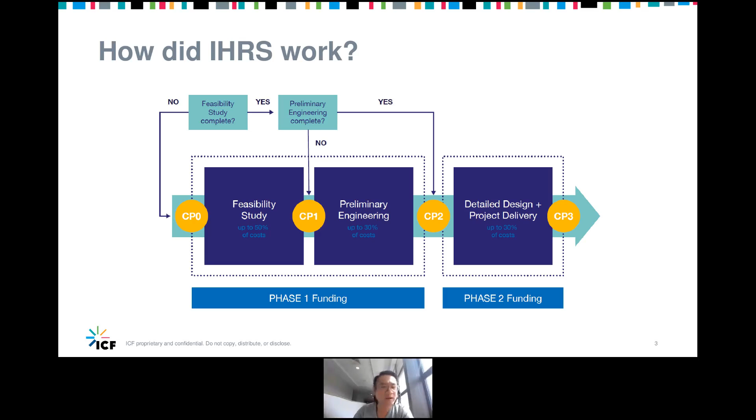So just to give you a flavor of what type of applications we've got in IHRS, typical ones were efficiency gains. There were a lot of replacement or redesigning of their existing system for efficiency gains. We fortunately got quite a few applications on utilizing low-grade waste heat. And we've also got quite a few interesting ones looking into multi-point waste heat recovery from multiple sources, multiple temperature ranges, and different heat qualities. So highly challenging, and always encouraging to see quite a few ORC interest there as well to electrify low-grade waste heat. We had a very interesting commercial carbon capture and utilization project.

And relevant to heat networks, we have been looking at quite a few data centers on sharing of energy resources, either through a cluster or internal heat networks. And a few more interesting ones like phase change materials, and most of these low-grade waste heat opportunities actually require quite a complex commercial arrangement and they're usually very challenging.

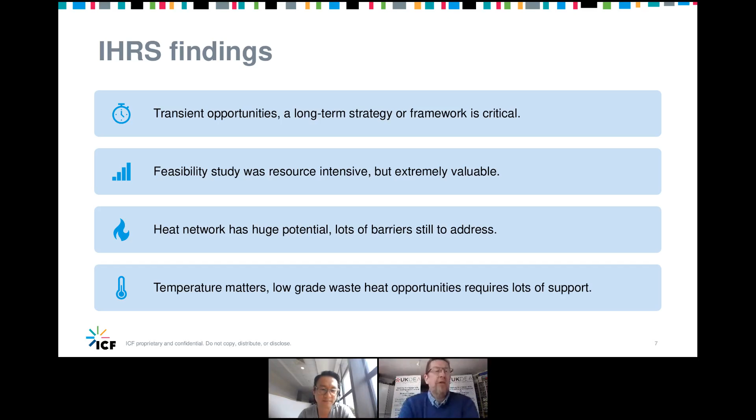Thanks very much indeed, Yeen. So Tom, if we can pull Yeen's slides off, and if I can invite Dominic, Mark and Cliff to come and join me. I think, Yeen, you gave us a very helpful point to dialogue with BEIS about, which is the funding required to develop these projects at the feasibility stage.

We were chatting a bit in the speakers chat about what would be useful to talk about in this final wrap-up section, and Joel was keen to put each of you individually on the spot and ask you either your biggest challenge in utilising waste heat in heat networks, or, if you had a government official in front of you, what would be your one ask to solve that problem. So Dominic, as you went first, can I put you on the spot first?

Well, they're related, as you might expect. From our experience, one of the biggest challenges is getting potential providers of waste heat to cooperate with us when we're doing feasibility work, or project development work more generally. And I know it's something under consideration in the zoning policy that BEIS are working on: an obligation to cooperate imposed on heat suppliers, around the provision of data, which could go on to mandate that they supply heat to a network. So those would be my asks.

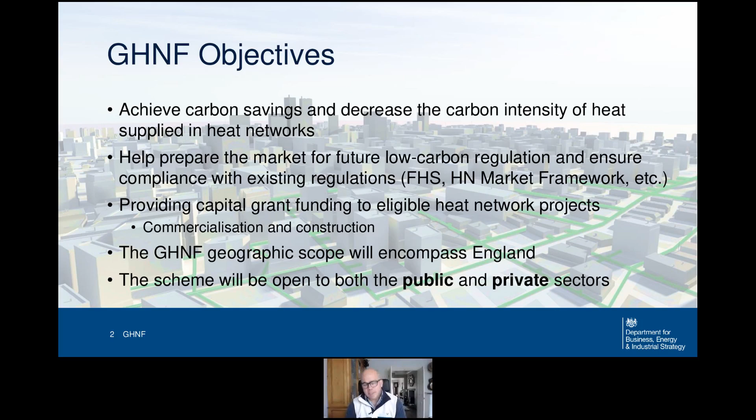We started last summer a series of stakeholder workshops, or discussion forums, to start to get a feel of the industry's thoughts on what we were proposing. That led into a call for evidence, which took place last autumn, and then shortly after that, we launched a consultation process at the end of November, which ran through to January.

So currently, we're dotting the I's and crossing the T's on our consultation response, which is moving into approval. So hopefully, we'll be publishing our response to the call for evidence and consultation next month. I would hope certainly no later than the beginning of July, but certainly we're aiming for June.

And then the work really from now is helping develop a pipeline of healthy projects, supporting the market and getting a nice group of projects ready to make early applications next April. But I'll lead on to a bit more of the detail.

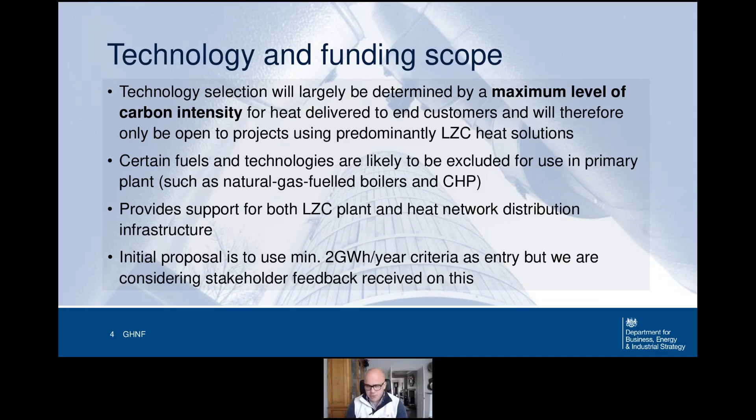We have had a lot of feedback on that, and it's likely, particularly for rural locations where the heat density is a lot lower, that we're going to take a view on number of dwellings rather than a firm and fast 2 gigawatt hour minimum. So that's one of the changes that's likely to be coming up, which again you'll see more when it's formally published.

The application and the way that they're assessed, as with HNIP, it's going to be quarterly application rounds over the 3 years that we run. We've also taken on a lot of feedback, and we want to make it as open and transparent as possible in terms of the way that we're scoring these, and we will be making available well before, in fact in July, the application forms.

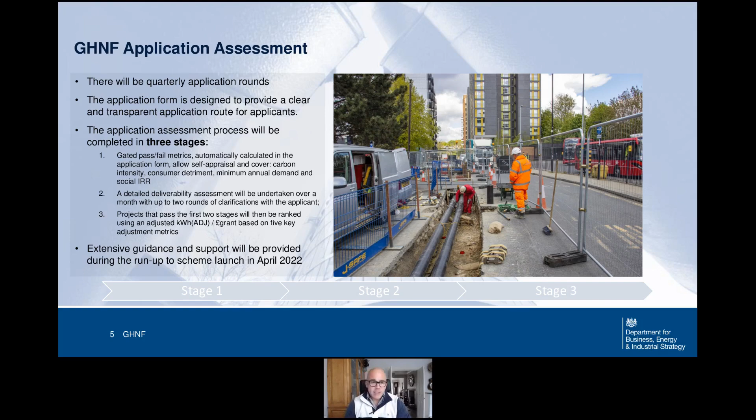There's a model, a financial model, a commercial model. There's going to be lots of guidance and support documentation, which enables a 3-stage approach. The applicants themselves will be able, in the first stage, to determine whether their project passes muster in terms of 4 initial gates.

So it's pass or fail, very, very clear, and the documentation and the model will actually indicate whether this is the case. So we've got the carbon gate, and that is based on a maximum ceiling of carbon intensity that we'd accept. We have a measure of consumer detriment, which measures, particularly in the case of domestic consumers and micro businesses, whether there's any detriment to them, and it measures against relevant counterfactuals. And then there's the 2 gigawatt hour per year minimum demand, which we mentioned.

Again, that's likely to be different for rural projects, and also where a project's traditional financial return is not as great. We want to give opportunities for projects that have got a really good social IRR to help. So that's another one where we've got obviously clear benefits for the environment and clean air. So that's the first stage. So that's very much done by the applicants themselves.

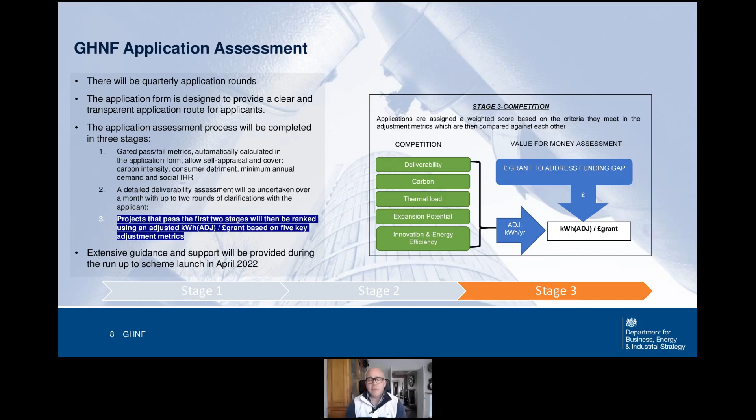But we will be putting a lot of support and guidance out there, and I'll come on to some events that we're looking to host in the coming months. So the next step, as I mentioned, we'll be publishing the consultation response, and we've got the guidance and application forms. We've got a plan to have a lot of ongoing workshops, some more general, and some focusing on certain aspects, commercial, financial, negotiating heat, for example. We'd probably do some further events looking at utilising waste heat.

We may well be doing something with the Coal Authority, looking at utilising waste heat in flooded mine workings, for example. These are all events that we're looking to do, and we want to publicise them as much as possible and get as many people in there. We want to really help get as many good projects ready, dare I say shovel ready, to make applications next April, as soon as we go live.

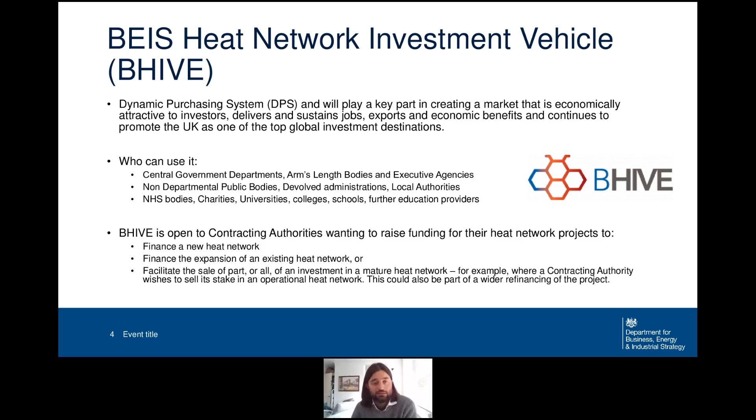Other sources of funding, so it's probably more pertinent to what we've been describing today. There's the Industrial Energy Transformation Fund, the IETF, which took on the waste heat element that was previously delivered independently by the Industrial Heat Recovery Support Programme, the IHRS, which Yeen spoke about. And why I put this here is that this can essentially fund the works to support the heat recovery within an industrial application. And then you can use the Heat Network Fund to fund the actual heat network grabbing that heat.

The main thing with these is that you need to be aware that we're not allowed to double fund. So you can't get the heat recovery to be paid for by both the IETF and then also by the likes of the Green Heat Network Fund. This is quite standard practice. We were able to deal with this with the likes of RHI and HNIP, the Heat Network Investment Project. You just need to make sure you're not double funding. We can provide more details about that after this if you want to know more. And that's a £315 million fund. And, as I said, it's supporting the overall energy transformation, but waste heat's part of it.

There was the public sector decarbonisation scheme. Although it's closed, it has been used to fund heat networks across public bodies. I was involved in one in particular, which is sort of building a network across a hospital, which is really exciting with boreholes. So that's something to be on the lookout for.

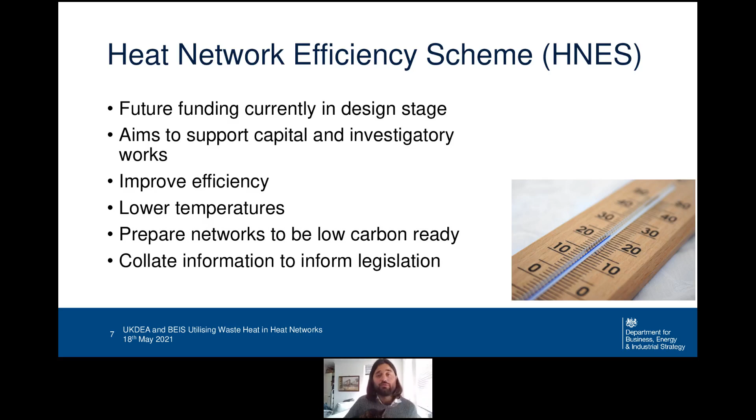Because there should be more information to come as we work out exactly what it's going to look like. And I should also say it's planned to be both what we call capital and resource, so you can use it to fund research, but it will also be used to fund some of the capital works.

Other things to be aware of. So you heard a little bit. I'll talk about that a bit later. So there's some work we've done, which is City DEEP, the city decarbonisation project. It assessed 5 major cities and looked at a heat decarbonisation process for them and where heat networks work.

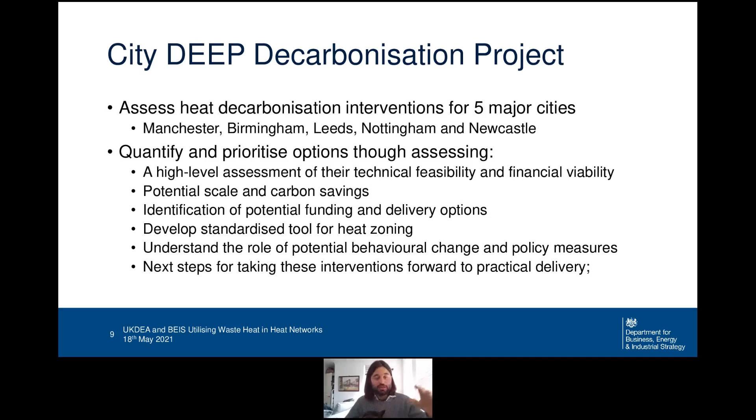And the main things to come out of that, well, loads of it was really interesting, but for us is a standardized tool for heat network zoning, and to really look at the hierarchical method of looking at heat decarbonisation. So we're not just flogging heat networks, but we're looking at it as a whole system approach and looking at whole system benefits.

Other interesting projects, apologies for this coming across quite small and whizzing through it. You've heard about GreenSCIES. There's also LotNet, and so GreenSCIES is there to investigate and deliver a detailed design for a smart energy system that integrates low carbon technologies across heat, power, and mobility.

And LotNet stands for Low Temperature Heat Recovery and Distribution Networks, and that was to demonstrate and prove that low cost, low carbon thermal energy networks integrated with electricity and utilities networks can form these flexible and highly efficient smart grids. Lots of partners, I'm involved in both of them as well, and both are really good projects whose findings will feed into our thinking within government.

So other support for the sector that we've managed over this time. This was really shown up over COVID, and I would have liked to have had a bit more time to talk about this, but we realised that there were some very specific issues that the heat network sector would face as a result of COVID. For example, if a heat network operator went bust and they turned the heat off, that could be a lot of people without heat, or businesses, and some of those could be critical, or the individuals could be vulnerable.

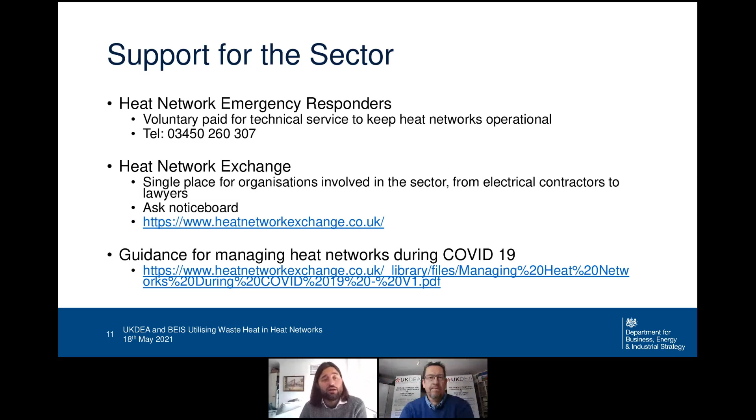And we also produced some guidance for managing networks during COVID, but it's also just some good practice. Some of it's quite simple stuff, and some of it gets into the more nitty-gritty. So all of those links are there. And within the guide, it's also got the phone number for the emergency responders.